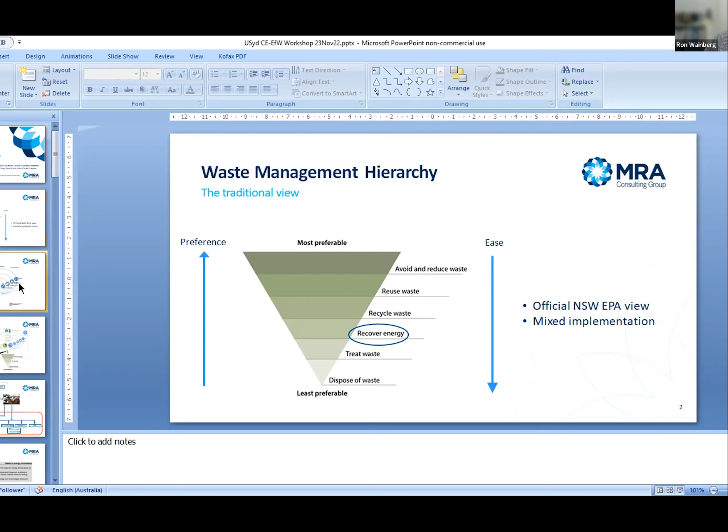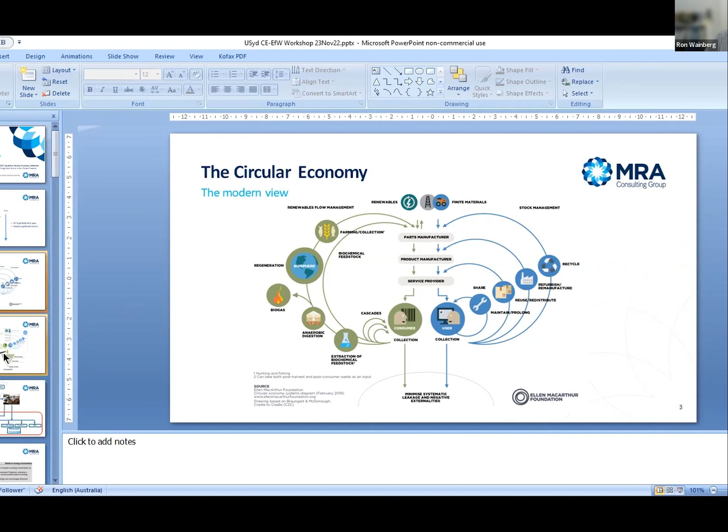So along comes the circular economy. This diagram, I'm sure you're all familiar with, is from the Ellen MacArthur Foundation, and it really focuses on the top of the tree and sees waste as something that we design out of our economy. Materials get reused, they get shared, the items are repaired, and it all goes round and round in the circle, with a very, very small amount of material dropping out the bottom into disposal, and that would be minimised. So if you look at it all together, that's how the two, if you like, fit together. The circular economy really is a better way of expressing the top part of the hierarchy.

Now, if stuff is going to flow through to the bottom part of the hierarchy, energy recovery, treatment, and disposal, the amount of material that's flowing down there is going to really depend on how efficient the circulation is up the top. If it's very efficient, if we achieve full circularity, there'll be very little, if anything, flowing down the bottom. But I put it to you that that will take time. That'll take a long time, because we're talking about a fundamental change in the way the entire economy is structured.

You've got the simple fact that industry seeks to sell more goods. Industry's production is dependent upon people buying a new thing. You've got fashion coming in, and there's a severe cultural change that's going to be necessary in society to achieve full circularity. I'm not saying it won't be achieved. I'm saying it will take a long time.

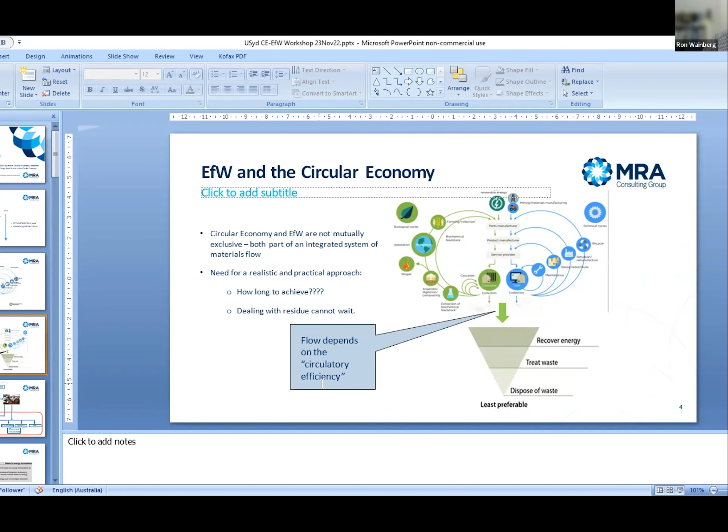And meanwhile, we've got residues that we have to deal with. And those residues are not going to wait for us. We don't want them to pile up. And I personally, I think most people would agree, we don't necessarily want them to go into a landfill. So how do we stop that? Well, what are the options?

I've shown there, I've blown up, if you like, the bottom of the tree. I've got the Ellen MacArthur butterfly up the top. That's not meant to demean, it's just for the sake of space. If waste is being generated, the first thing we have to ask ourselves is, can we separate the materials? If we can't separate the materials, we're going to go this way to the right. We're left with a pile of stuff that there's really not much we can do with.

At present, the only approaches I'm aware of for dealing with mixed general waste is either through thermal treatment, combustion, gasification, pyrolysis maybe, RDF, or sending it off to landfill. People have tried anaerobically digesting this material. Anaerobic digestion of mixed municipal or commercial waste has not proven to be very successful. For mechanical reasons, the digesters tend to clag up with a whole lot of materials that weren't taken out.

If you can separate the materials still, then there are other options available. In New South Wales, we used to have what we called MWOO, mixed waste organic outputs. This was the organic material that was left in mixed waste. It was processed, composted, and applied to land under certain circumstances. The EPA has put a ban on that. It cannot be done anymore, and so it is no longer an option.

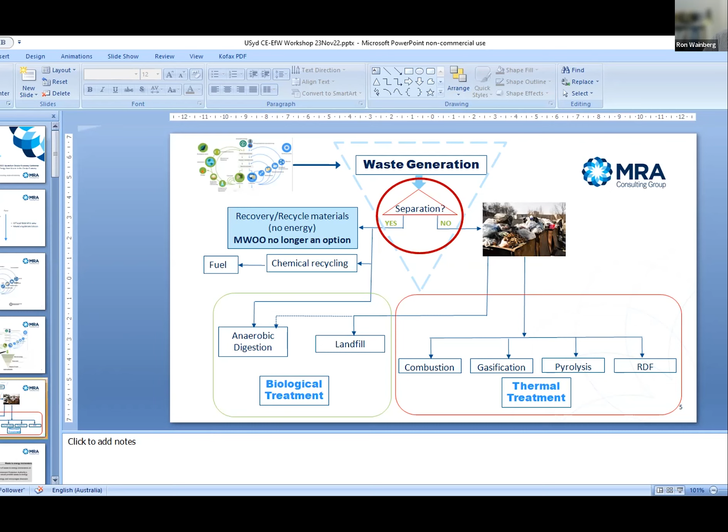Meaning if we do separate the material, really the only way we can go is chemical recycling or going down to anaerobic digestion with the residuals going to the right and being disposed of. That's a biological treatment option. But EFW's role is not very well understood. If you don't separate out the wastes, there's a limit to what you can do with the material. As I said, it'll either have to go to landfill or it's got to be burnt to recover the energy value. But there's a lot of well-intentioned, misguided opposition to it.

What I've reproduced there is a resolution from the New South Wales Local Government Association conference from March this year, where they adopted a motion that said that Local Government New South Wales considers burning energy an outdated technology and encourages diversion rather than incineration. Leaving aside the grammatical question of what does burning energy mean, I think they mean burning waste to recover energy. I think that position is very well intentioned, but it's unfortunately misguided. It sees energy from waste as competing with resource recovery, whereas in fact it does not. Energy from waste is what you do with materials once you've recovered what you can and you're left with the residuals.

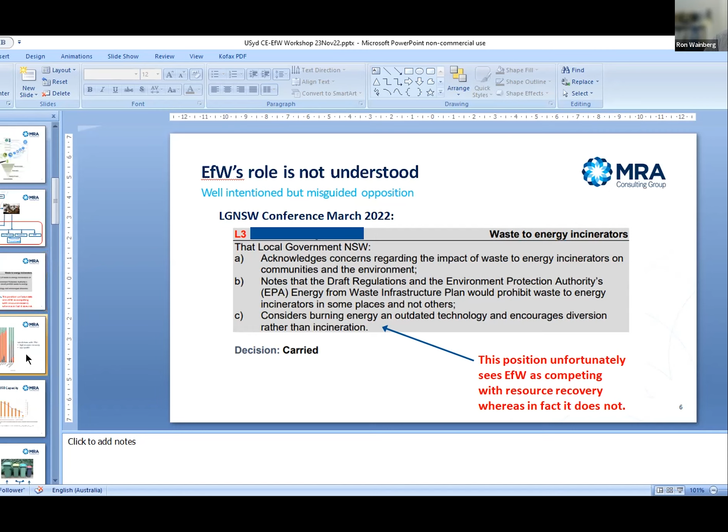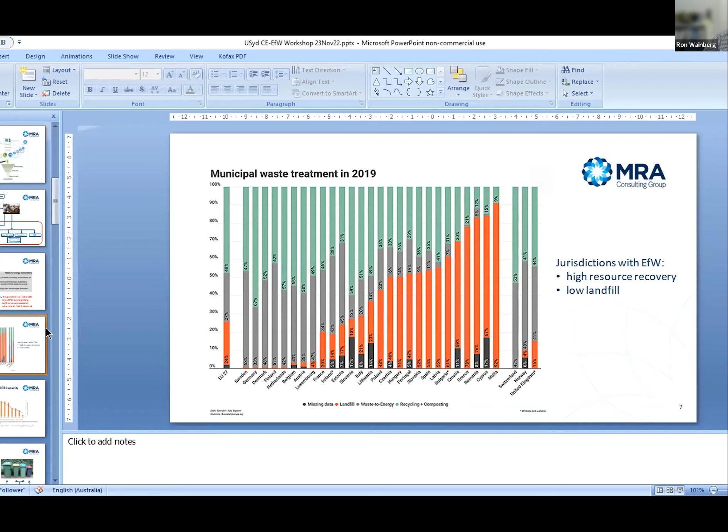The Sydney region's landfill capacity is depleting, and it's depleting quite quickly. New South Wales government recently prepared a paper called New South Wales Waste and Sustainable Materials Strategy, Guide for Future Infrastructure Needs, released June last year. They note that Sydney's putrescible landfills will reach capacity around 2036 and the non-putrescible landfills around 2028. What are we going to do with this waste? Because we're not going to achieve circularity. We're certainly not going to achieve 100% circularity, but significant progress towards circularity is not going to happen in the next 5-6 years.

Developing a new landfill site is going to be a real challenge. You can't do it, I don't believe, in Sydney. I don't believe there'll be any more large-scale waste infrastructure in the Sydney Basin, which means there's going to have to be long-haul transport, implying extra cost. And of course, the question is, where to?

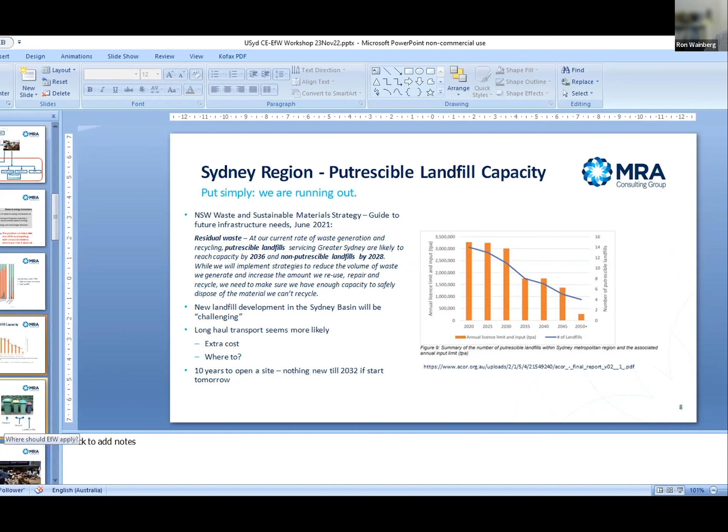Developing waste infrastructure, landfills, or energy from waste facilities is a long-term process. We have approximately 10 years to go, and there'll be nothing new until 2032 if we were to start tomorrow. I should say if we were to start yesterday. I think if we're not careful, there's a crisis coming. There's lots of holes around, but let's get the social license to use them or to build energy recovery facilities before we get ahead of ourselves.

So where should energy from waste apply? We need clarity of what's being dealt with. And this comes back to the local government resolution I mentioned earlier. Typically, households in Australia have up to 4 bins: a red, a yellow, a green, and sometimes a blue. Education of the community about what material goes into what bin is vital, because energy from waste only applies to the red bin. The green bin goes to compost. The yellow bin and the blue one, if you've got one, goes to recycling. It's the red one which is destined for disposal, landfill or energy from waste.

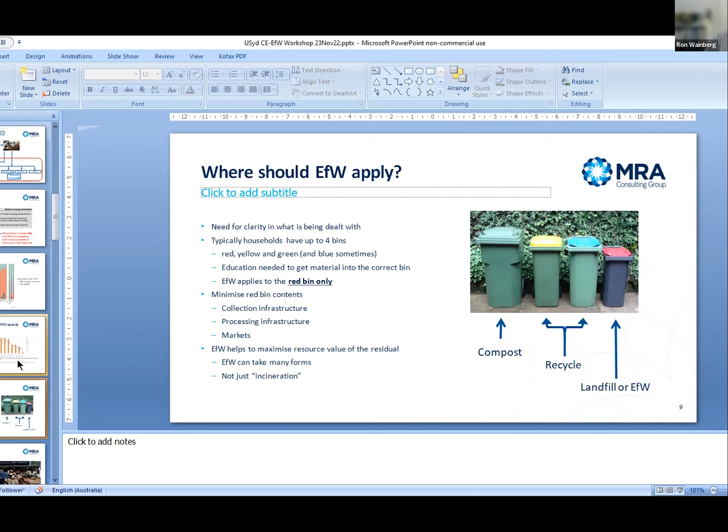We have to get society to minimise the red bin contents. We need the right collection infrastructure, the right processing infrastructure, and of course, with the material that is reclaimed, you've got to have a market for it. The recent experience with RedCycle and their collapse trying to reprocess plastic bags is a case in point. The market wasn't there. The whole thing fell over, unfortunately. Energy from waste helps to maximise the resource value of the residual by getting the energy out rather than just putting it in a hole in the ground. Now, energy from waste can take many forms. It isn't just incineration, and we'll talk about that a little bit more in a minute.

I want to mention disaster waste. It never seems to be considered, and it's probably going to increase. We've seen a lot of it in New South Wales during this year. Unfortunately, you can't predict it. So it's very, very hard to build infrastructure which would cope with this stuff because it arrives on an ad hoc basis. If you get a bad fire, if you get a bad flood, you're going to have disaster waste. But there's no way of really predicting long-term the amount of waste that would make one or more processing plants, or recovery plants for this material, financially bankable. What is the answer? Unfortunately, it's going to be disposal. Remember, there's a lot of it coming in one hit.

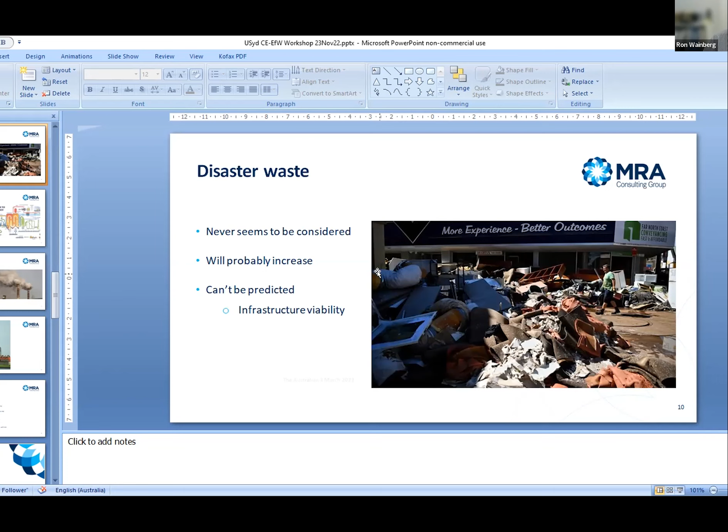Now, talking about the different types of energy from waste facilities, we're going to hear about some innovative stuff from other speakers, looking at gasification and hydrogen and so forth. But there are many pathways. Combustion is the classic way of doing it. There's over 2,000 incinerators that have been built around the world. These are omnivorous. They will take all the waste that you can throw at them. The stuff that can be burnt will be burnt. Other stuff goes through to the ash. You can get metal recovery from the ash, and the ash can be used in aggregates.

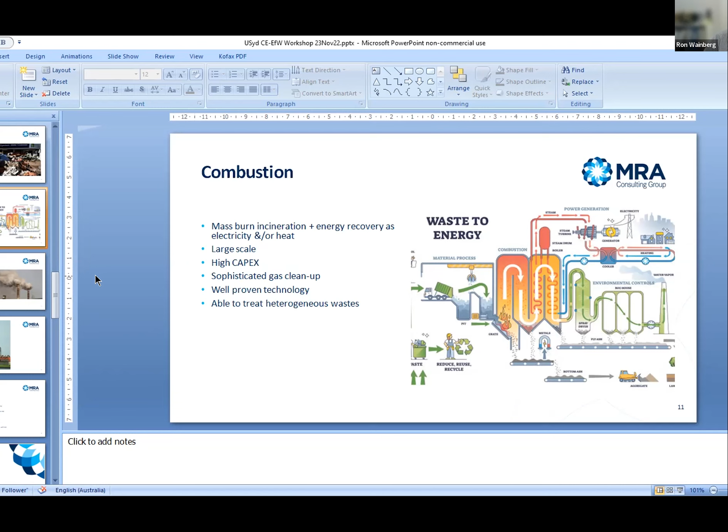Unfortunately, this has a very bad reputation in Australia. There are a couple of plants being built in Perth right now, and there are 4 plants in Melbourne that are at various stages of development. There are none in New South Wales, though there's a couple of projects that are starting to raise their head: the one at Parkes and the Veolia proposal at the Woodlawn mine. But energy from waste combustion has an extremely bad reputation. There's a lot of community opposition and a lot of misinformation. And I find that to be a pity.

I think Sydney's landfill capacity is nearly depleted. New capacity in the Sydney basin is, I think, very unlikely. It might happen, but I've got my doubts. If we can circularise the economy, that's positive. That really is a step in the right direction.

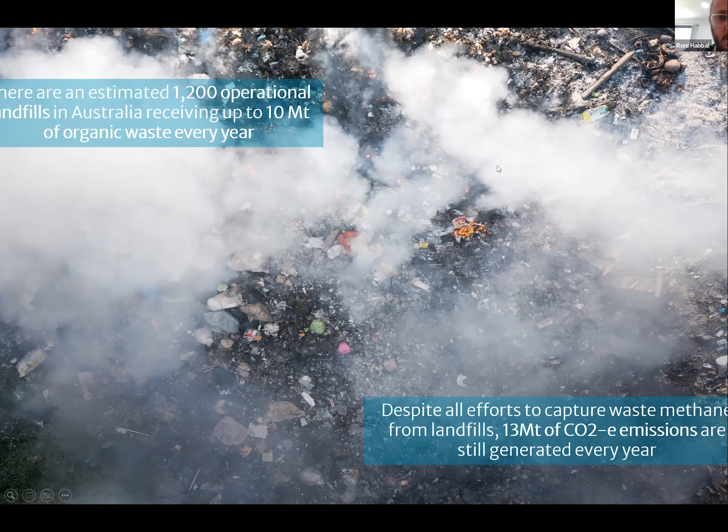Unfortunately, despite all the efforts that the waste industry is putting on capturing waste methane from landfills, we still see huge amounts of methane being released into the atmosphere in the form of fugitive emissions or lack of efficiencies, or simply because the landfill gas is not recovered properly. There is actually 13 million tons of CO2 equivalent emissions being released every year still, despite all these efforts. So what can we do about this? How can we address this methane challenge at the national level?

As we mentioned, most of the organic waste today, if it's not going to composting, if it's not being source separated, it's ending up in landfills. And this is creating a lot of biogas.

There's other types of organic feedstock, such as agricultural waste, manure from animals, and crop residues that goes to different facilities, such as anaerobic digestion facilities in regional areas. In many cases, those types of residues are not even processed, and they are decomposing on the land, producing a lot of methane emissions.

There's also a number of anaerobic digestion facilities in urban areas trying to process what's available from urban organic waste, such as industrial waste or liquid waste, grease trap, and also wastewater treatment facilities trying to recover biogas from sludge. From that biogas, there's a significant portion that's not being recovered today, and there's a significant portion that's being released into the atmosphere. So we want to develop a technology and a value chain that can actually ensure all of that biogas is recovered and all of that methane coming from biogas is being addressed.

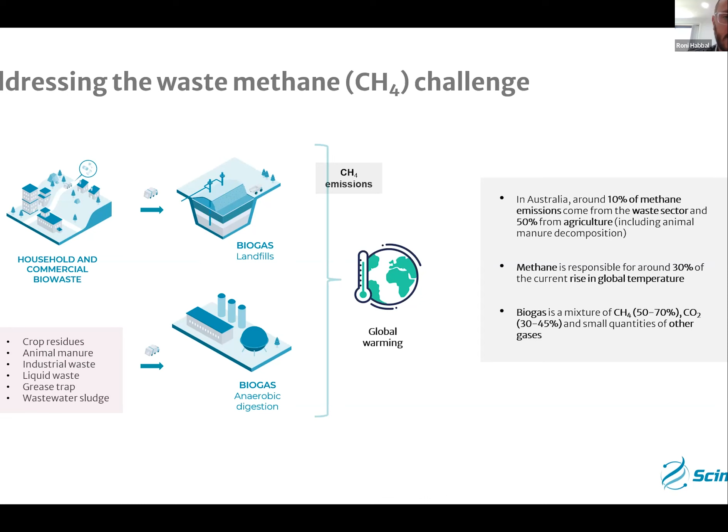Now, it's probably worth mentioning that biogas is a mixture between methane and also carbon dioxide, as well as other gases like H2S and nitrogen. So in terms of the current situation with the biogas industry, we noticed that if we look at biogas systems in the landfill sector, around 50% of that biogas is flared. So it is being converted into carbon dioxide, and we are losing that energy value from that biogas.

Only 4% of biogas at the national level is being used to produce electricity. And that is related to a number of reasons, because many of those sites do not have a connection to the grid. There's insufficient infrastructure on the site, or also because there's challenges in actually selling electricity to the grid and finding energy off-takers for it. With solar and wind becoming cheaper and cheaper, producing electricity from biogas as a business model is becoming more challenging for many proponents in this industry. So they are also looking at alternative solutions to utilize that biogas.

We also see that to invest in a biogas conversion asset, this is usually associated with high investment cost. And even though there is some support mechanisms like the Renewable Energy Target and the Emission Reduction Fund mechanism, it's not enough for us to have a biogas industry at scale in Australia. We still need to see more government policy in that space, more certifications for biogas-derived products for this industry to grow and for us to be able to make the most value of the biogas resources.

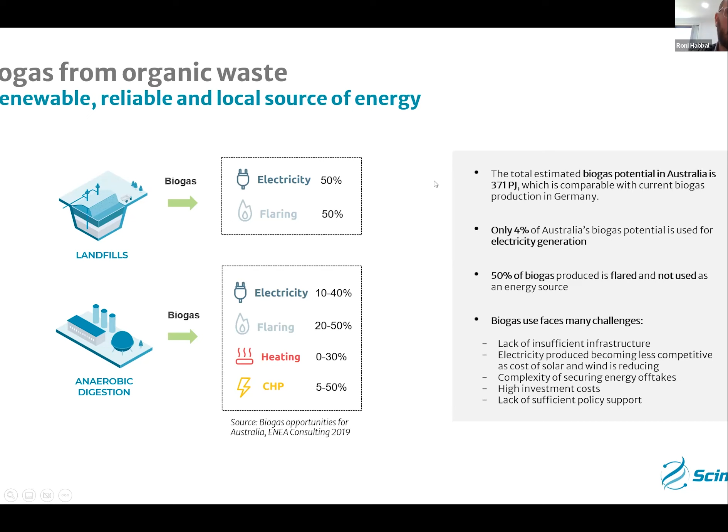So what we are trying to develop is also an alternative value chain for biogas. We believe that if we upgrade biogas into biomethane, we can unlock further value for biogas. Now, once we upgrade that biogas into biomethane and we separate that carbon dioxide out of the biogas, we will end up with a biogenic methane feedstock that we can use in many ways. Many proponents are looking at injecting that biomethane into the grid, so to offset and to displace natural gas in heating applications or in cooking and home applications.

But there's also an alternative pathway that we think has a high merit and can really support Australia with its decarbonization journey. If this biomethane from biogas is actually reformed into hydrogen using existing technologies, we can produce green hydrogen fuel, renewable hydrogen from biomethane. And as we know, there's a lot of focus on how we can use this hydrogen in different hard-to-abate sectors, such as heavy transport, on-site heavy equipment, and also in power generation. We believe that converting biogas into hydrogen through this biomethane reforming process will unlock this value for biogas.

And for the hydrogen product itself, instead of selling it to the market at wide scale, the idea is that the hydrogen will be used on-site to power heavy equipment like compactors, heavy trucks, and other heavy-duty machinery, and be able to create a circular economy value chain on-site where the local gas is used to power the local fleets. There's also an opportunity to dispense this renewable hydrogen into waste collection fleets and into waste transfer fleets. There is often a lot of back-to-base operations happening between the landfill sites and waste transfer stations where the waste is coming from. So there is an opportunity to use that landfill gas, convert it into hydrogen through reforming, and then use that hydrogen to power those fleets. By doing so, we can offset a significant amount of diesel.

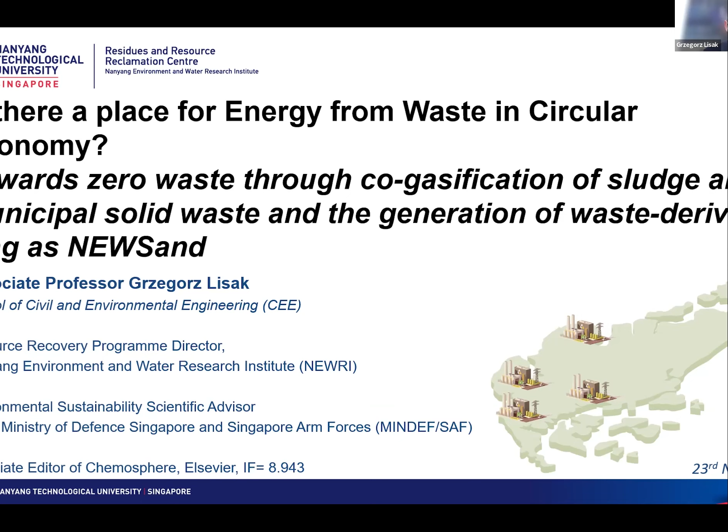Singapore is a waste-to-energy country. We have 4 waste-to-energy plants, and there are a few more being considered or built as I speak. We address all our general waste using incineration, because this is the simplest way to lower the volume of the waste that finally will be disposed to the landfill, but also we recover the energy. I think quite a lot of the information which Ron shared may overlap, so I apologize for that, or I'll try to skip it, but it should help you understand what I'm trying to convey.

So what sort of waste are we addressing? We work on municipal solid waste and also sludge that comes from wastewater treatment plants. This type of waste is very difficult to recycle; it's intermingled, it's dirty, nobody wants to touch it. The recyclers will not approach it because cleaning it up would require a lot of energy and resources to be spent in order to get some valuable materials out. So ultimately, for most of this type of waste, thermal treatment is the way to go.

You don't want to dispose this to the landfill because you start losing control of what these materials may release back to the environment. And we know that if the waste contains a lot of organics, and the composition of waste in Singapore contains a lot of food residues, this type of waste will generate a lot of methane. And that is a much worse greenhouse gas than CO2. So why contribute additionally to the greenhouse effect through incorrect practices in waste management?

So typically in Singapore, we would incinerate our waste, and whatever comes out as byproduct, except for energy that is fed back to the electrical grid, is bottom and fly ash.

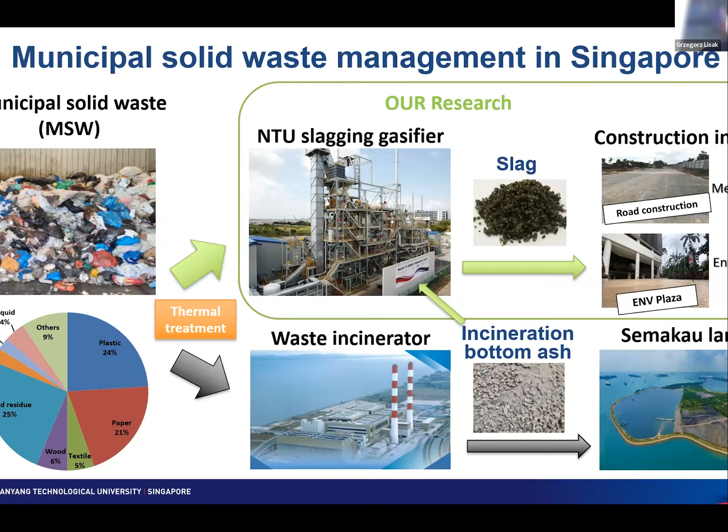for some applications. Also, this facility has been constructed in Singapore by the university to obviously increase the sustainability efforts of the university and Singapore in general in resource recovery and energy recovery. Also, it does provide an unbiased evaluation of this type of technology, so that information that comes out of it would not come from the industrial side, but would be validated by a third party, which is the university. So we do have a strong drive to be leaders in sustainability.

And for that reason, although a university typically does not, we operate this sort of relatively big facility that treats 11.5 tons of municipal solid waste per day. This technology, as I mentioned, is high temperature slagging gasification. It can accept very different types of waste: municipal solid waste, sewage sludge, incineration bottom ash, any sort of bioresidues, even medical waste, and some radioactive waste if needed.

So in Singapore, we generate quite a lot of waste. This is statistics from 2021. And this waste would come either from domestic or non-domestic sources. We are quite good at recycling waste from non-domestic sources, meaning industrial waste, because this type of waste is relatively clean. But domestic sources would have only 13% being recycled because of the very difficult nature of the waste, which is dirty and hard to clean and hard to recover. So ultimately, as you see, there would be a lot of waste beyond what we can recycle that finally has to be treated, as Ron also mentioned.

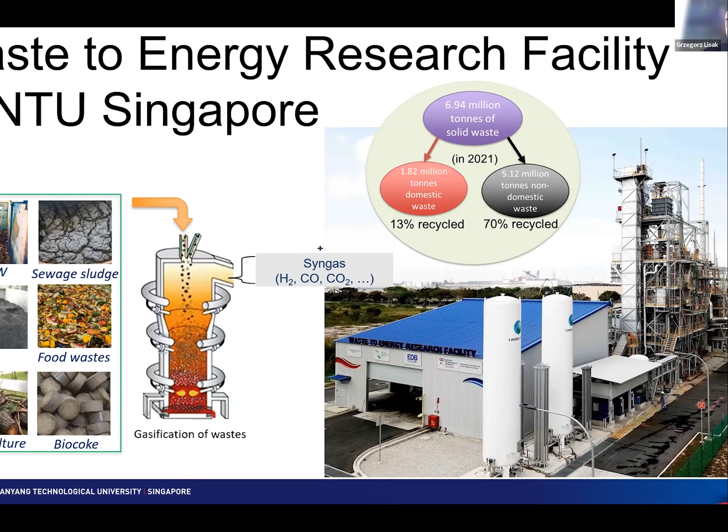This is a cross-section of the process itself. The key part of the process would be the high temperature gasifier, where we drop the waste together with auxiliary fuel and a slagging component to gasify the waste, meaning to produce a syngas that consists of carbon monoxide and hydrogen that later on would be combusted in a secondary combustion chamber to generate heat, which would be used for power generation.

And the other half of the process is basically a cleanup of the gas. So there is a stringent process for cleaning any sort of toxic components and things that you don't want to be released to the environment.

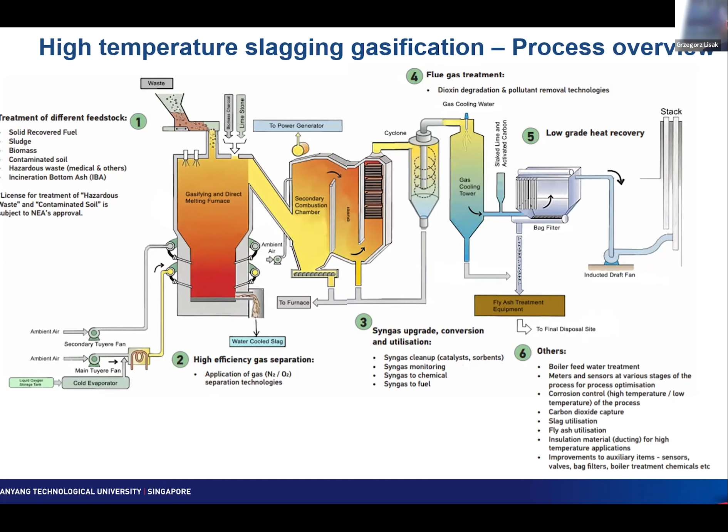So whatever comes out of the stack meets the requirements for the release of gases that is regulated by each country. This process that we apply was built in order to conduct R&D work. So we identify multiple places where we can plug and play, and we invite industry as well as universities to come and join us and look into test bedding different technologies around waste to energy.

Then I move on to circular economy, and I think Ron did a great job describing what we have to do in order to be really circular. I just want to mention that basically without final treatment of waste, which also would be smart, directed towards further resource recovery, you really cannot talk about net zero. You cannot really talk about being fully circular, because you're always going to generate residues.

No matter what you do in that circular economy concept, you will have sideways of different waste streams, obviously smaller than what we currently have, but they're still going to exist, and you don't want that waste to be sent to the landfill. You want it to be treated for environmental benefits, but also for energy recovery, and ultimately also for resource recovery. So when you have that cycle, when you design, use eco-friendly materials.

As consumers, we have to be thinking of what we are buying, how long we're going to use it, are those eco-friendly materials, and so on. So actually, we as consumers are part of the circular economy design. So there is power in our hands, because we drive what is being designed and what is being built and how much of it is being built, right? So let's not forget about that as well.

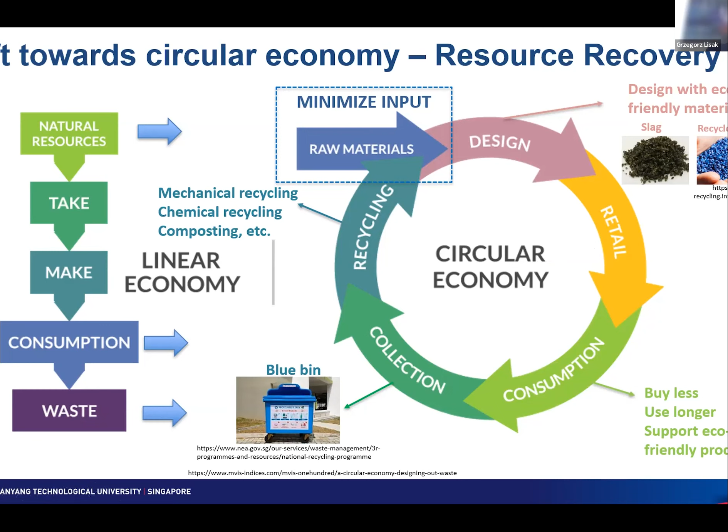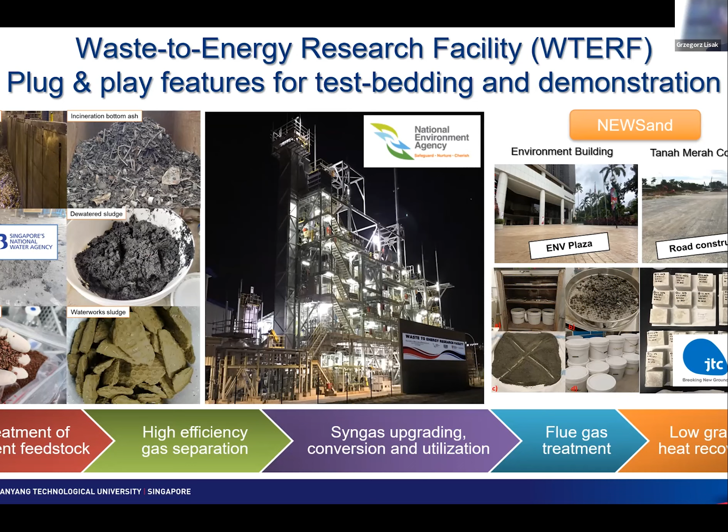But again, you're going to generate waste. So let's not forget about that. This circular economy without waste is simply utopia. So we need end-of-life technologies for anything that can no longer be reverted back, to be treated. And this is where we come in with our gasification technology, which is a next generation from incineration in terms of energy and resource recovery.

So I'm going to present some work that we did on treating sewage sludge, another type of waste that is horrible to treat. Currently in Singapore, we generate a lot of sludge. And that sludge, dewatered and dried, would simply be incinerated, but without energy recovery. Because it has a high moisture content, you actually have to supply a fuel in order to burn it. So that sort of incinerator, which is just for final waste treatment, is not an optimal option.

What we want in Singapore is to be able to convert this waste to useful resources and energy. Additionally, we generate waterworks sludge in Singapore, which has a high inorganic content, and that would be going directly to our landfill, and we want to avoid it. So the technology that we propose, high temperature slagging gasification, can address all these types of waste and generate useful byproducts. So we are now in the process of rethinking sludge management in Singapore.

I'm not sure if you are familiar with the concept of NEWater in Singapore, but what we are currently doing is generating a NEWSand. So that's another thing. Whenever you develop a material that is possibly of waste origin, you should also think about the perception of it. And in Singapore, we are branding things. We are giving them names that perhaps take them away from where they come from. So hearing NEWSand is easier than talking about post-waste treatment materials, for example.

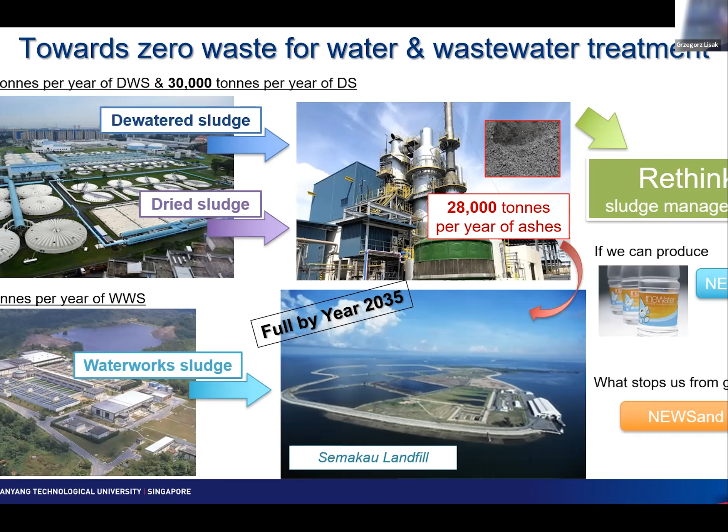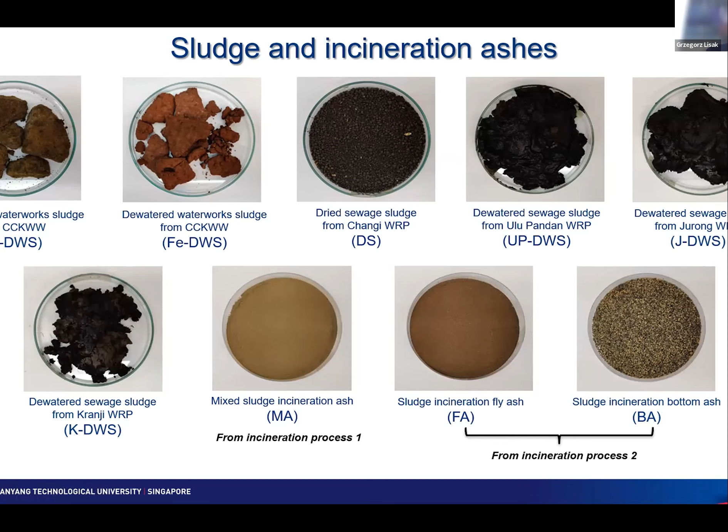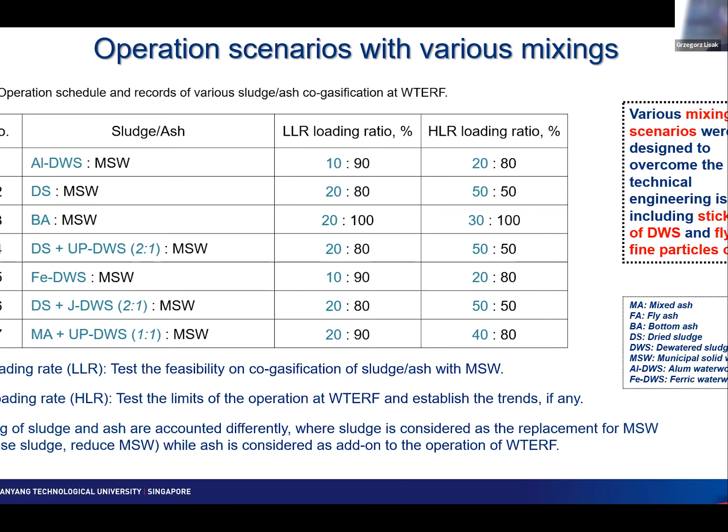Here are the types of sludges that we used. Together with the sludge, we also tested different incineration ashes that come from the current incineration processes of that sludge. And we designed the study to mix municipal solid waste with different amounts of sludge and different types of sludge or their mixes. We designed them to have low and high loading rates to push the system, to see how far we can go with the system and operate in stable and environmentally friendly conditions.

So the process would look like this: we feed municipal solid waste at different ratios with the sludge and their ashes into the gasifier. As the gasification process continues, we generate metals and the slag, or that NEWSand, as I call it, and both products can be reused for different purposes.

They are commercially viable products, we can sell them, while the gas that is generated in this process goes into generation of electricity, and then after the treatment of the post-combustion gas, we can release the gas back to the atmosphere in compliance with our environmental agency regulations.

So gasification offers you another function. Aside from generating these byproducts, if you break the process in the middle, you generate the syngas, and without combusting it, you can recover the syngas and drive chemical synthesis. So what we believe the next step of development of waste to energy in this type of process would be is to drive waste to fuels and waste to chemicals domains after the recovery of syngas from the treatment.

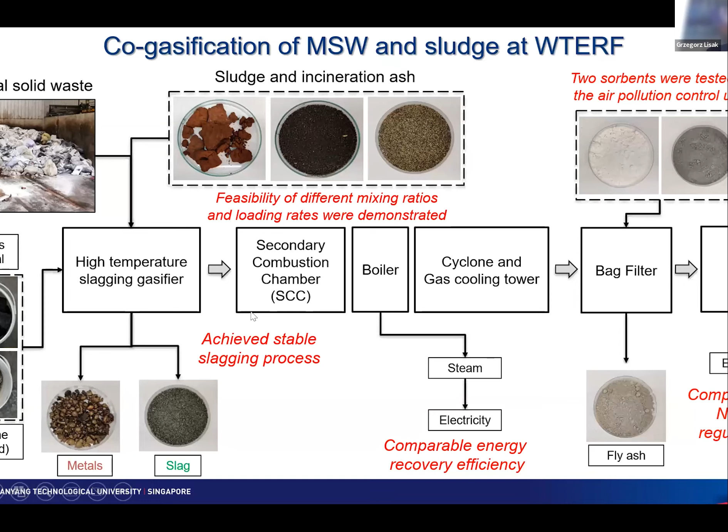Then here I just present you a test that we conducted. All are standard-based tests. I know the slide is a bit boring, but I show it to you only to let you know that whatever we generate, we really have to comply with a number of standards in order to identify those materials and processes as suitable in terms of environmental applications and use of the material in final applications. So it's not that simple to generate the materials and apply them elsewhere. You have to comply with a number of standards so that the process can be deemed environmentally suitable.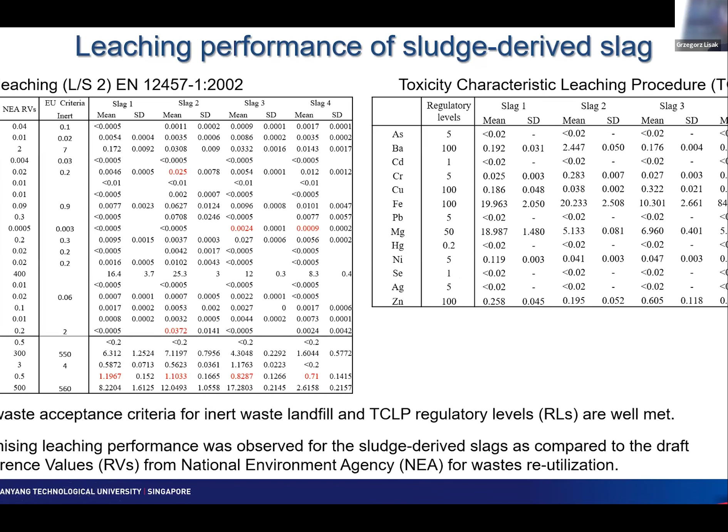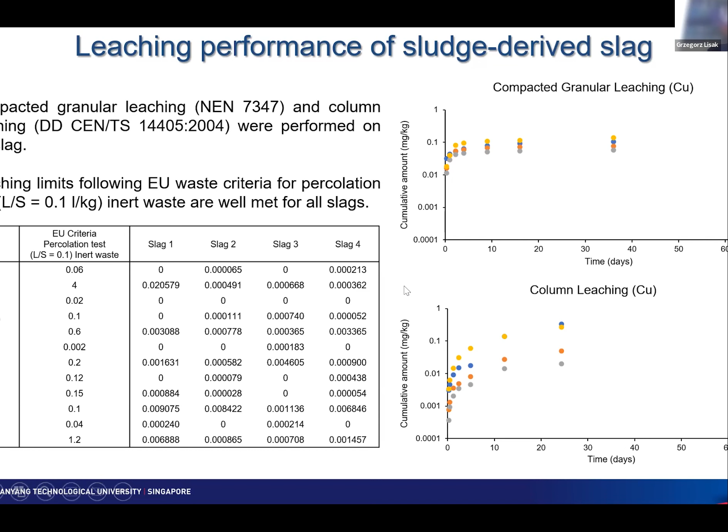Then here you have the TCLP test, which only identifies if the material is hazardous or non-hazardous. And we meet the standard, which means that the slag, new sand, is a non-hazardous material. Here you have another test, typical behavior for leaching of different types of metals. Again, we meet the standards. I will not spend much time discussing those results.

Following up with geotechnical properties, if you want to use this new sand as construction material, you need to meet geotechnical regulations that tell you that it is actually similar to sand. So through the accredited tests, we identified that slag, compared to river sand, is very similar and meets the same category for geotechnical tests, which means that it fits under fine aggregates. So whenever you do construction, instead of using sand, you can use this material 100% and have confidence that structurally the concrete will be resistant.

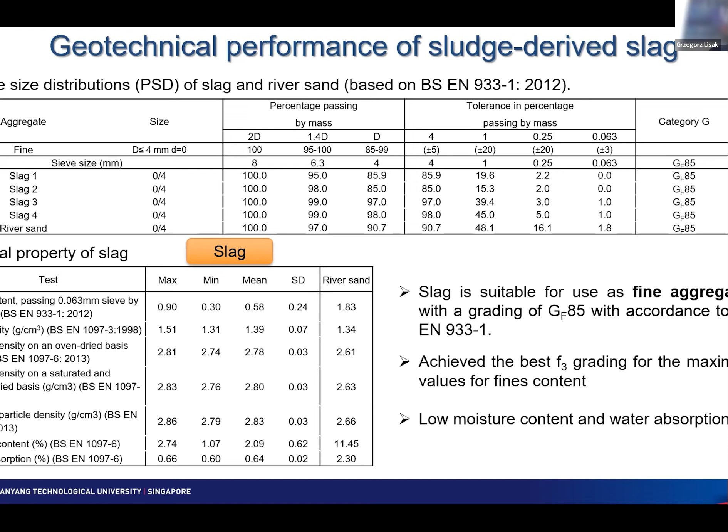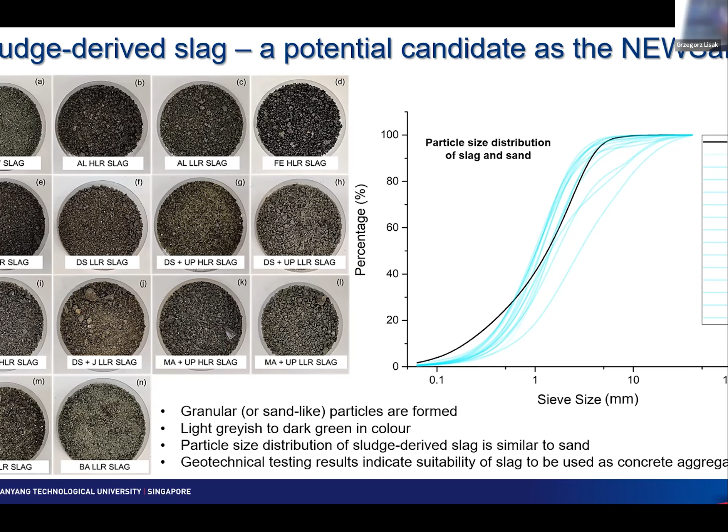Additionally, environmental analysis showed that quite often the sand that we import has heavier contamination than this waste-derived new sand. Depending on where you collect the sand, you may expect higher heavy metal contents than in the material derived from waste. That was very surprising when we did that test. When you think about applying this material in construction, you must ensure that the strength of the concrete itself will be suitable for specific applications.

So what we did, we created a mortar, basically OPC concrete, with OPC cement with a new sand, 1-to-1 ratio. And we compared it between a sand and the different new sand coming from mixes of sludge and municipal solid waste. And you can see that the strength at different times of curing is very much similar for different types of mixes. Some need a bit longer in order to gain a final strength, but ultimately the strength would be very similar between sand and the municipal solid waste and sludge municipal solid waste mixes. We meet the criteria for non-structural concrete, and this is where we now are.

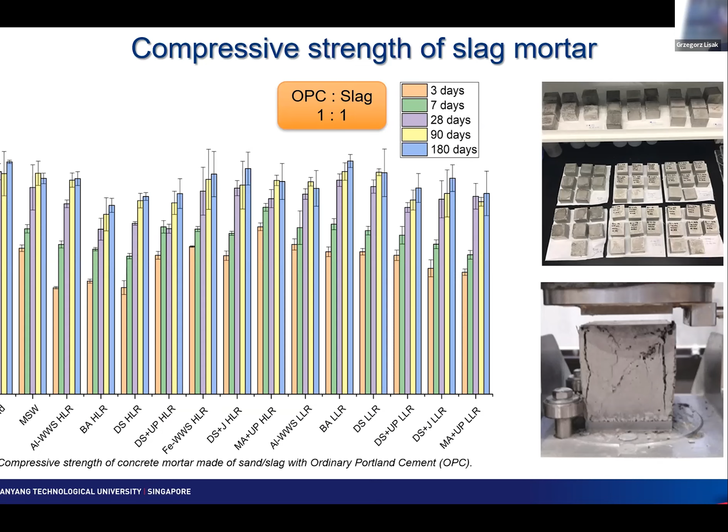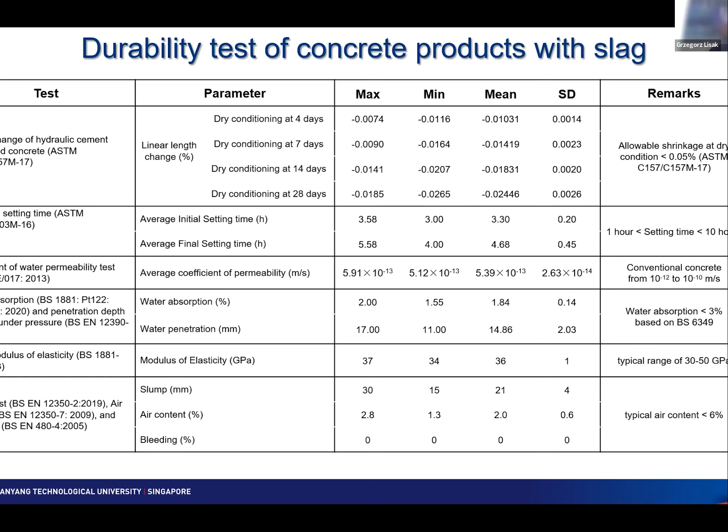We can construct whatever if this is a non-structural concrete. The next step in this research project will be to develop the mixes and test them for structural concrete. So again, here are more standards in terms of the concrete design that we have to follow and we meet. So ultimately, this type of material can be used in construction. So I hope you understand what I tried to convey.

We recover energy, we still get a lot of energy from this type of waste. But aside of it, the residue does not need to go to the landfill, but can be used in construction. So ultimately, you create another vertical, another sideline in that circular economy concept without generating final waste material that has to be dealt with. So we have confidence in treating sludge and municipal solid waste in this way, but sludge is still at a 50% ratio. So in the next generation project, we're going to look at feeding more sludge into the system, going close to 100% treatment.

Another thing is that, as I mentioned, waste to energy must be a vital part of the circular economy. And the only question is how we do it. I say, let's do it smart. Apart from energy, let's recover the materials. With that, I leave you and I welcome any questions.

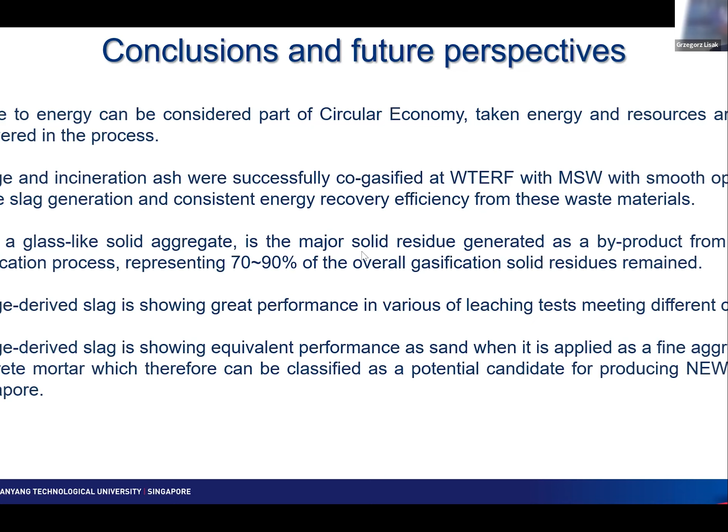I've got one here from Jun Park, just from the pictures at the end of my presentation. How does the Australian facility treat the emissions from the process? These are treated by basically standard processes of scrubbing and filtering the effluent gases. I take it that's what you mean, Jun. Would anyone else like to comment?

Greg, Roni? Yeah, I did mention in my presentation that almost half of the line itself, the process itself, is to assure that the gas that is being released is going to be clean enough. So you need to follow regulations in a specific country. For Singapore, our emissions are monitored online, and the information does not go to me as an owner of the facility, but goes directly to environmental agencies. So they see what is being released and at what quantity. Whenever we don't meet that standard, we would be notified.

And obviously there are penalties, but the true mechanism behind this is to correct the process itself, so you don't release anything to the environment. And you are correct, lots of scrubbing of gases is being applied. You have to remove any acids that are in the process. So we use slaked lime and activated carbon in order to capture dioxins, heavy metals, and acidic vapor. So ultimately, whatever comes out of the stack is pure enough in terms of environmental assessment.